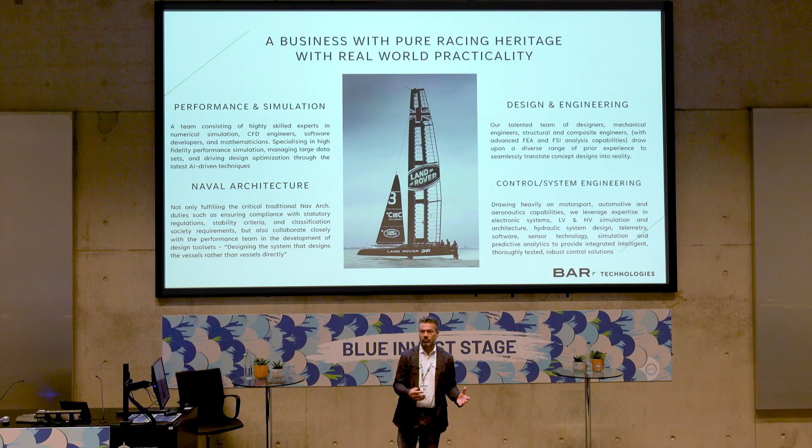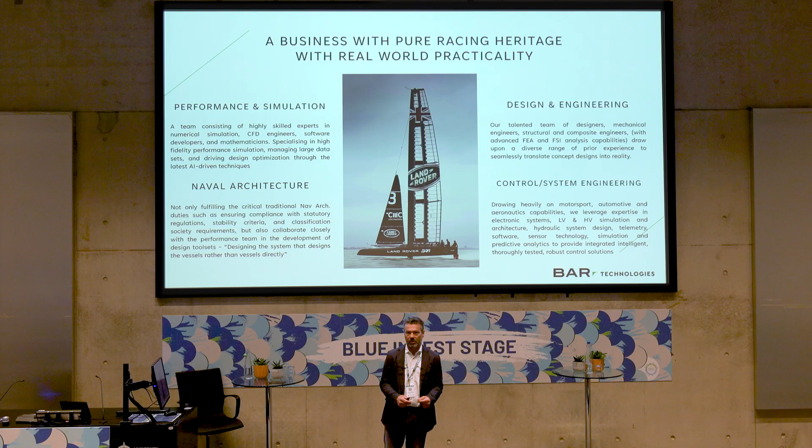BAR Technologies stands for Ben Ainslie Racing Technologies. Ben is probably the most famous sailor in the UK, with many gold medals and world championships, and now involved in the America's Cup. This business was born from the 2017 America's Cup cycle. At the end of each cycle the rules change, leaving a vacant period where engineers are often lost to Grand Prix racing or America's Cup racing, along with their tool sets and skill sets. Ben, along with Simon Schofield and Martin Whitmarsh, started this business to bridge that gap - to not waste the technology developed in the world's best yacht race, and instead bring commercialisation.

So we are a small inventor. We rely very heavily on simulation and use those tool sets all the way through our business. Whatever we design, we do not design by a human - we actually train neural networks to interrogate potential designs and then choose the design that best fits.

So we cover performance simulation, design and engineering, naval architecture. One really important aspect in the marine industry is that everything moves slowly - not just the atmosphere and pace of life, but the control engineering itself. Rudders move slowly, engines move slowly, and some of the projects you'll see require faster, more detailed, more accurate movement. So we've hired a big team of control systems engineers from automotive, Formula One, and aeronautics, and brought them to BARTech. Now we have really rounded skill sets in terms of more traditional naval architecture and people driving the business forward.

The second slide is on this graph, and you'll see - so it is a company dedicated to decarbonisation, but one of these projects we've done is certainly not green. We did need to do it when we were starting the business because we had to pay the bills. So there's the America's Cup boat on the top left.

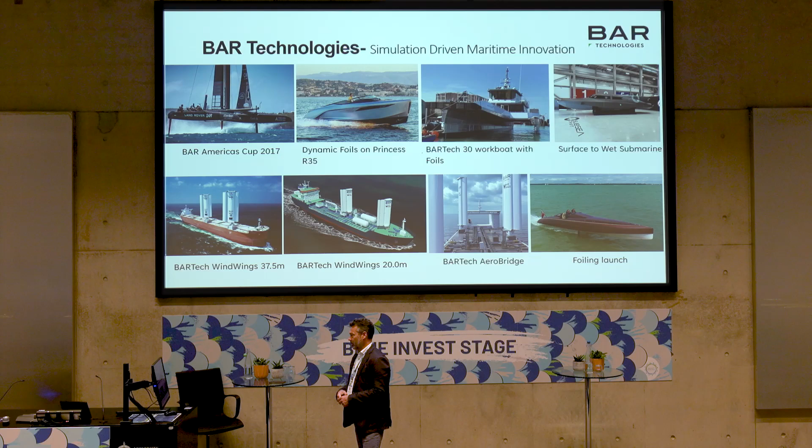Now on to the real decarbonisation and probably our future. We have two products, and I'm going to go through all of these on the bottom shelf here. So BARTech WindWings, that red boat there, I'll show you a video in a minute, but it's over 200 metres long. It's a bulk carrier taking grain around the world, and we're putting some very high-tech sails on top of it, about 37.5 metres off the deck. You can see the extent of what modern sailing means.

In the middle, we have some slightly smaller wind wings, a similar thought process, but in a smaller version. The second project I'm going to talk about is the BARTech AeroBridge.

Have a look at the accommodation block at the back of the vessel. It's basically a block of flats that just pushes through the water, creates a horrible draft and drag, and our efforts here are actually a low drag accommodation block. As you can see, it's two accommodation blocks with a big hole in the middle. We've got some very clever people, but when you look at it, you think, well, that's not brilliantly clever. But actually that accommodation block does provide thrust to the vessel.

And lastly, a foiling launch. It's actually a 6-seater, and there's my CTO and my Chief Operations Officer enjoying a jaunty trip around the Isle of Wight. I was going to ask you which one you thought was not green, and of course, it's that one.

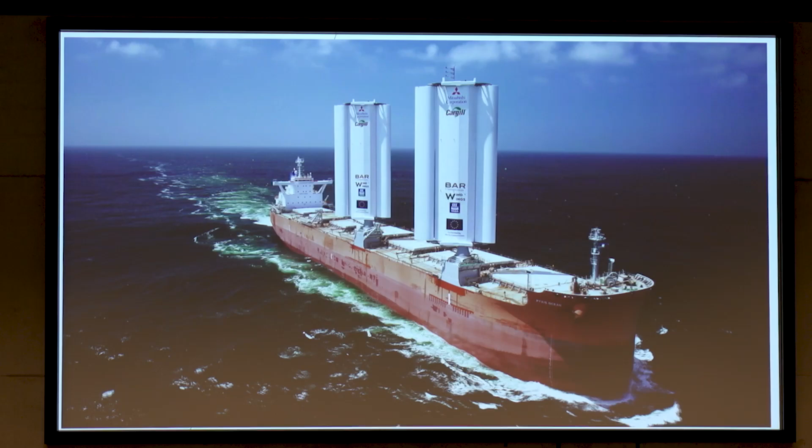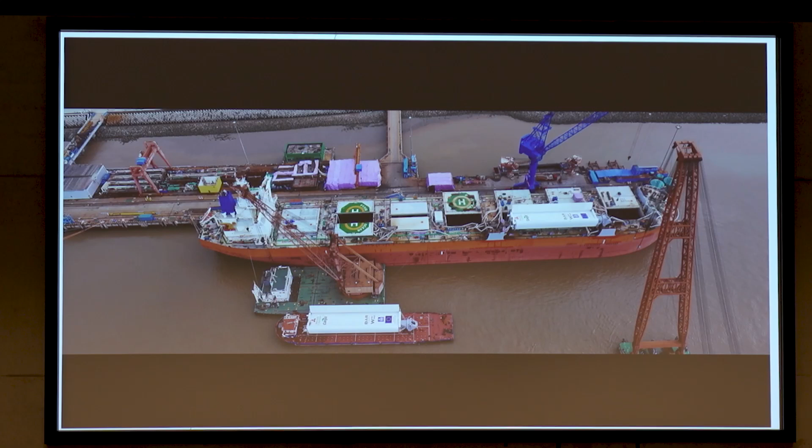This project is truly revolutionary. It's never been done, specifically not at this size and scale. Perhaps it's more than commercial. We believe in decarbonisation of this planet. Innovation doesn't exist without taking risk, but we think this technology is really a game changer.

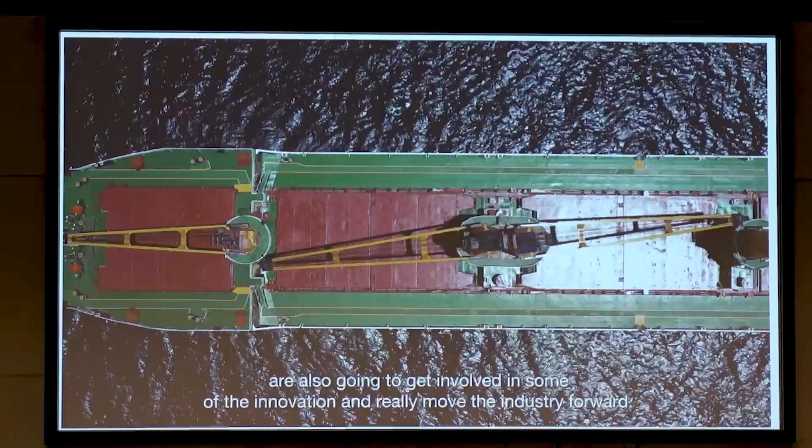The industry is an extremely hard industry to decarbonize, so there aren't many tools that you have. It's really important that we, as users of the maritime industry, also get involved in some of the innovation and really move the industry forward.

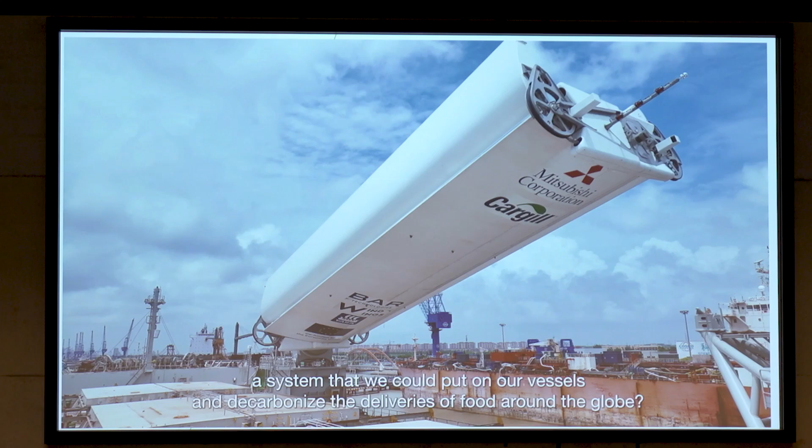Cargill walked among us and said, could you actually invent a wind propulsion system for us? A system we could put on our vessels to decarbonise the deliveries of food around the globe. They probably know more about shipping than BARTech. We're the techie guys knowing how to invent things, and that partnership's been really strong. We fed off each other - that's about energy, expertise, technical know-how, and drive and determination. It's what we've done together. It's not easy, otherwise everybody would be inventing wind for ships.

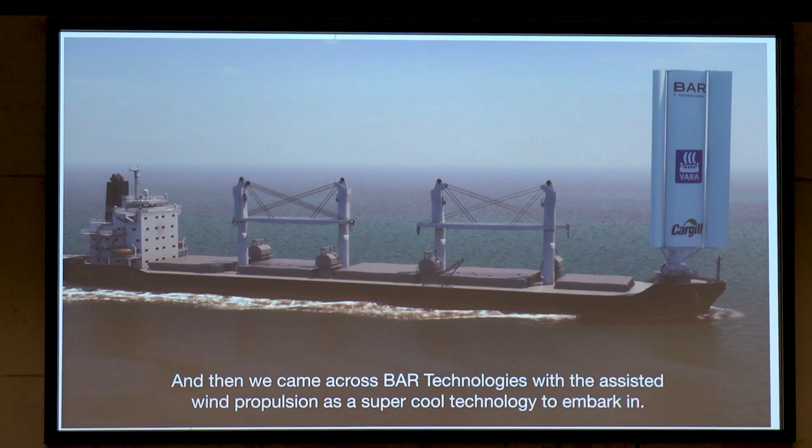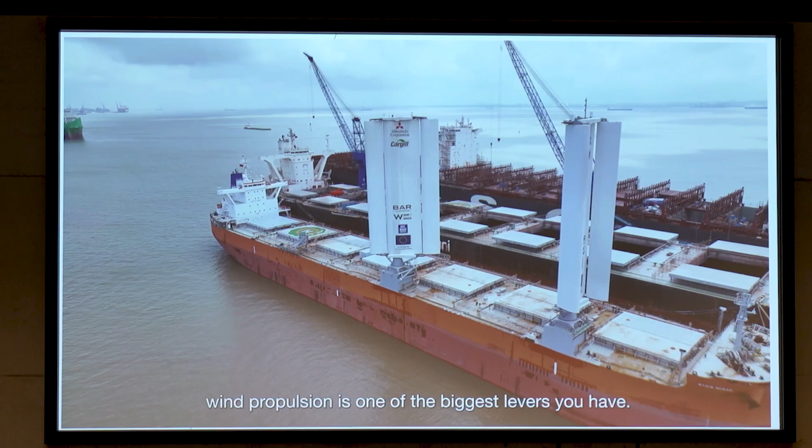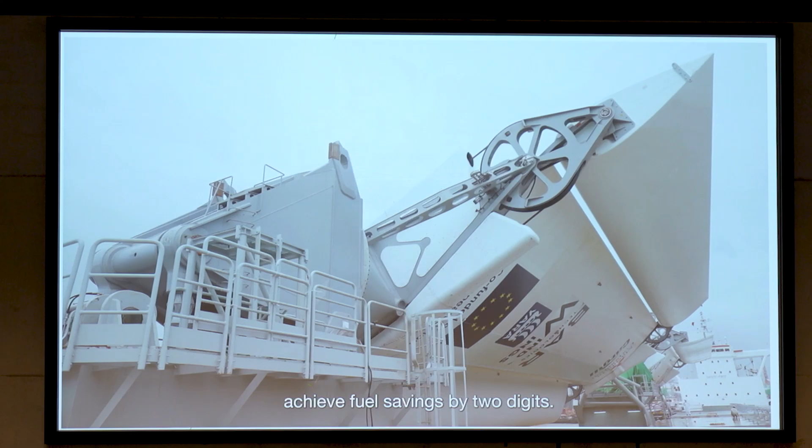We were looking for interesting technologies we could bring in-house to make the maritime industry greener. Then we came across wind-assisted propulsion technology as a super cool technology to embark on. If you look at the rate of savings, wind propulsion is one of the biggest levers you have. There are so many energy-saving devices in the market today, but wind-assisted propulsion is one of the very few solutions that can achieve fuel savings by two digits, and it can be retrofitted.

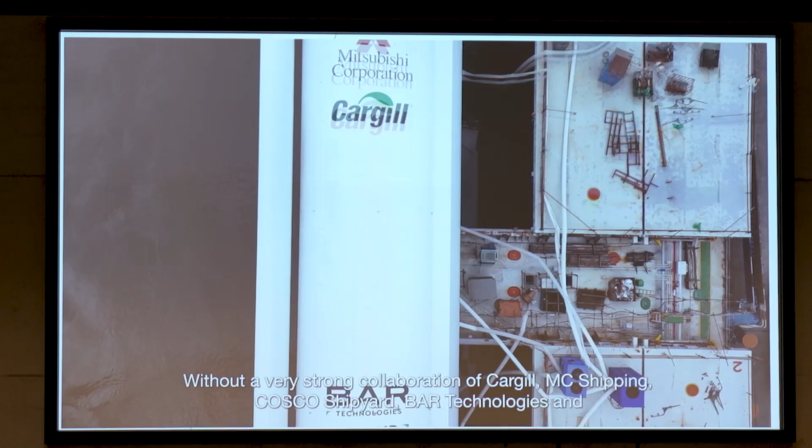One of the strong learning points in the shipping industry is it's all about partnership. Without a very strong collaboration between Cargill, MC Shipping, COSCO Shipyard, BAR Technologies, and the underlying technologies, we would not have been able to bring these to the water that fast.

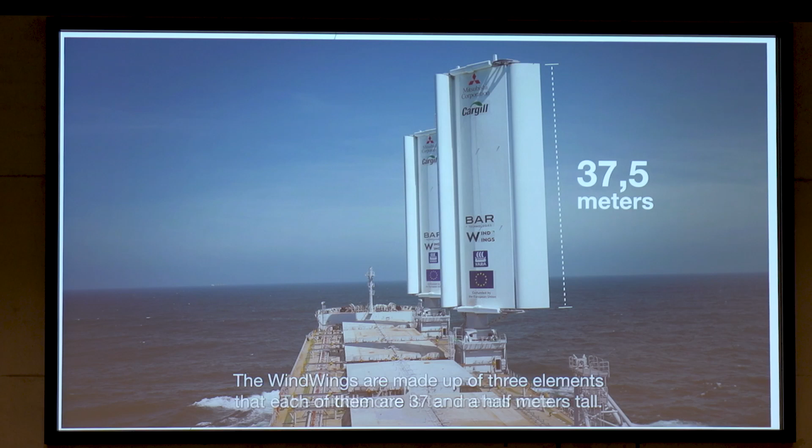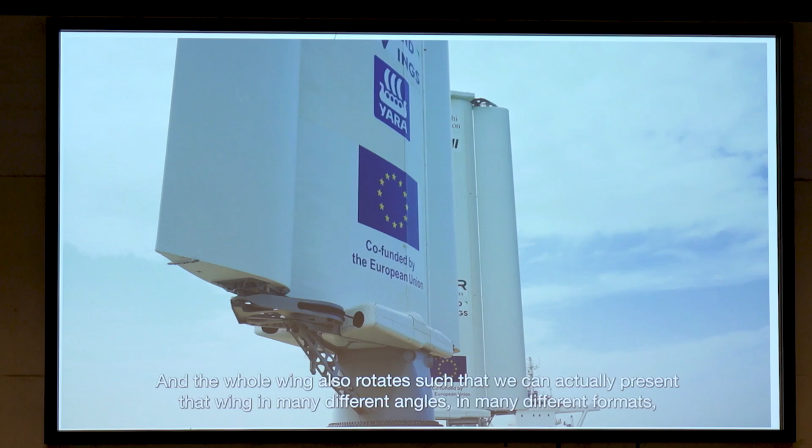The wind wing is made out of 3 elements, each 37.5 metres tall. The middle one is 10 metres wide, and the front element is 5 metres wide, a duplicate of the rear element, also 5 metres wide. They work together - each element has a central pivot, and the whole wing also rotates, so we can present that wing in many different angles and formats, depending on the wind angle and wind speed.

This innovation is extremely important for the maritime industry because it's a technology using wind, which is free fuel at the end of the day. Each of these wind wings is saving 1.5 tons of fuel a day - that's 4.65 lower CO2 emissions per wing per day. That's next level savings. We hope to gain a lot of insight from this solution, which would open the doors to expanding the application to other ships in our existing fleet.

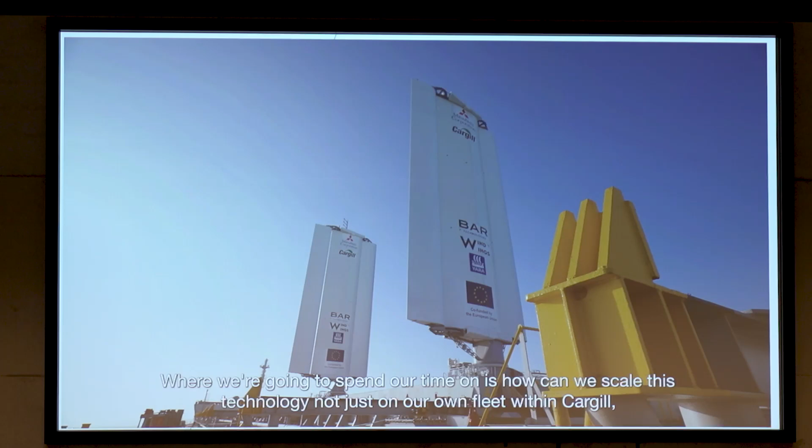The real fight is the legacy fleet and new builds in the future, to bring grain, in the case of Cargill, or other goods around the world using far less fuel. Where we're going to spend our time is figuring out how to scale this technology, not just on our own fleet moving cargo, but also very much in the rest of the industry.

So that's very much a reality now. It's been sailing, and I mean sailing, for a year. We've picked some really good partners to start with. Cargill's the biggest private company in America, and of course Mitsubishi don't need any introduction, they own the vessel.

For our second vessel, we chose, or it chose us, of course, the owner chose us. This is the Berge Olympus by Berge Bulk. It is the world's most powerful sailing cargo vessel. As you can see, it has 4 wind wings on it. It's actually chartered to Vale in Brazil, and it runs from Brazil to China and back.

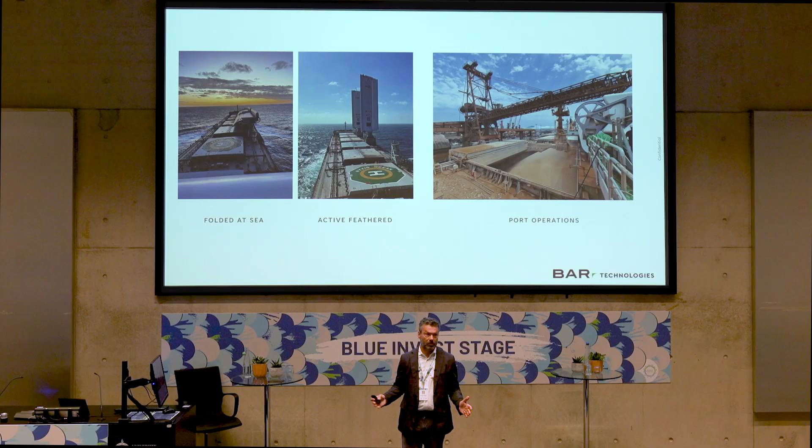It's really important that you get the operational capability right of any wind propulsion device. You've got to be able to get it out of the way of tugboats, you've got to be able to control the power, and you've got to be able to ensure that loading and unloading is done unencumbered.

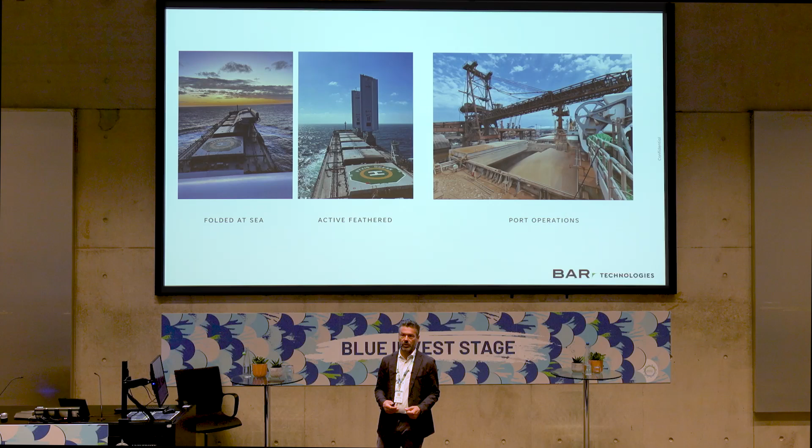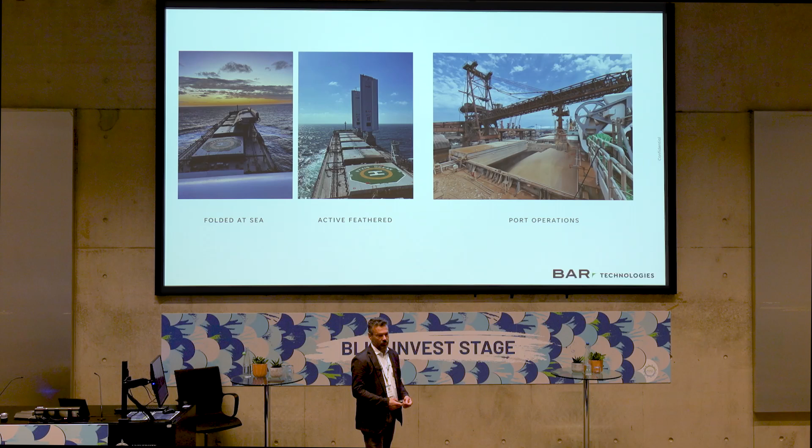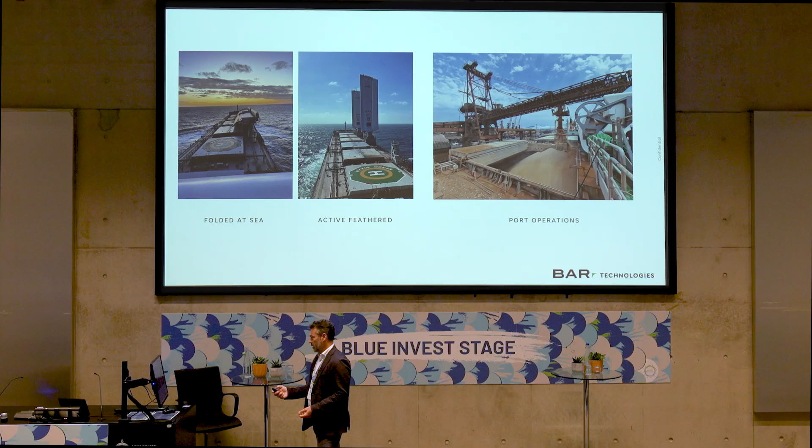So there are a number of different positions that we have the wings in. Folded at sea, that's also how the boat comes into port, because it's inside the beam of the vessel. Active feathered, we encourage people to fold the wings at 50 knots, which is of course quite a big wind, but we're able to depower the wings and have the wings up to 100 knots, which is a very fierce storm. And then portside operations, there's one further fold to get them outside the hatch covers.

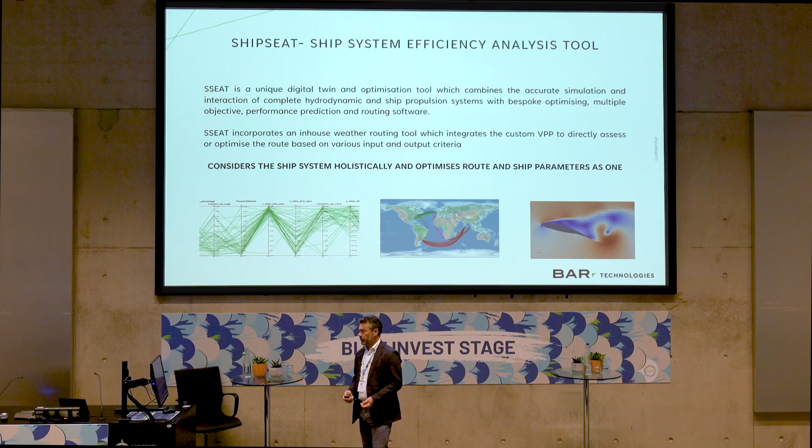I'm not going to go through this in detail. In fact, I'm not going to go through this at all in the interest of time. But it's basically our design tool set that I was talking about in our introduction. I will go through this.

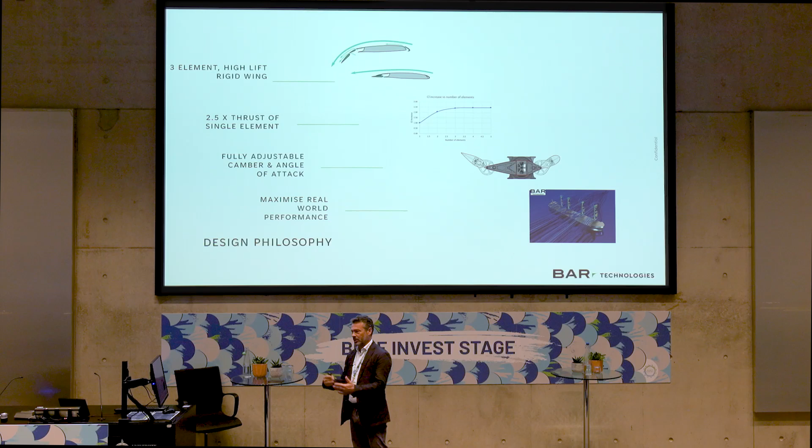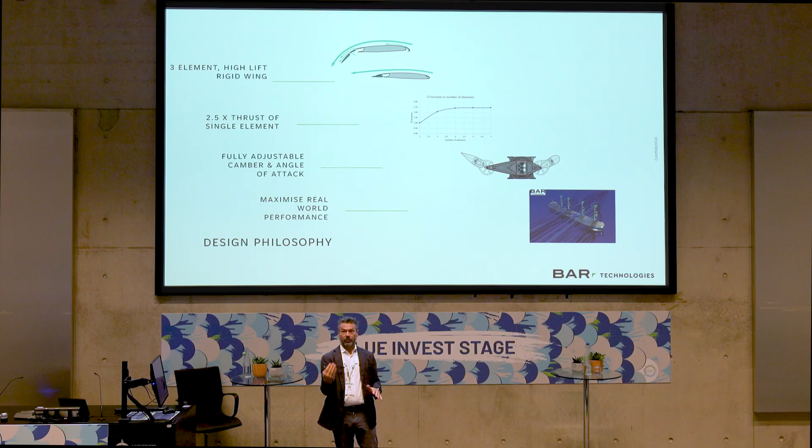Actually, what's the best analogy for a wind wing? It's actually an inverted aircraft wing. So I travel in the cheap seats around the world, so when I'm coming into land, you can actually see the nose coming out the front of the wing and the tail coming out of the back of the wing, and it's a nice sort of cambered shape. And what the aircraft's doing is actually slowing down and providing upward thrust as it's slowing down and landing nice and gently. So you take that thought process and invert the wing and put it on a ship.

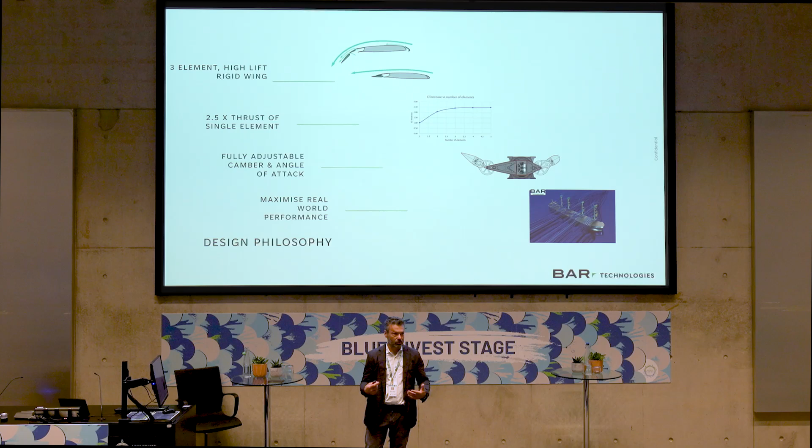What you're then doing is creating a mechanism to give you forward thrust. Add some very clever control systems engineering, and you've got a workable solution for sailing around the world.

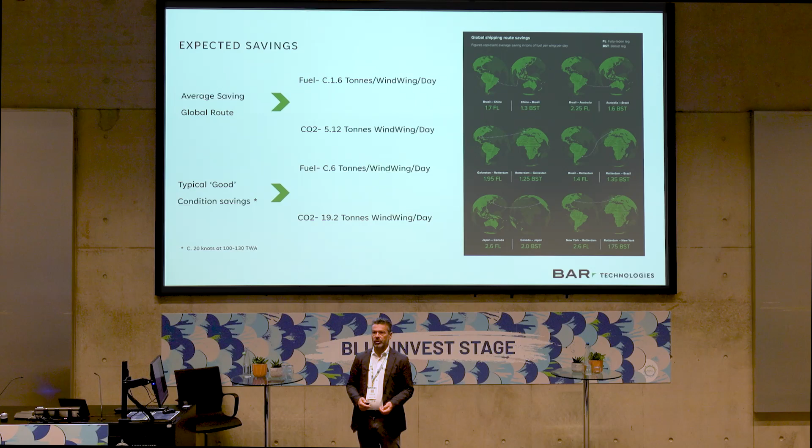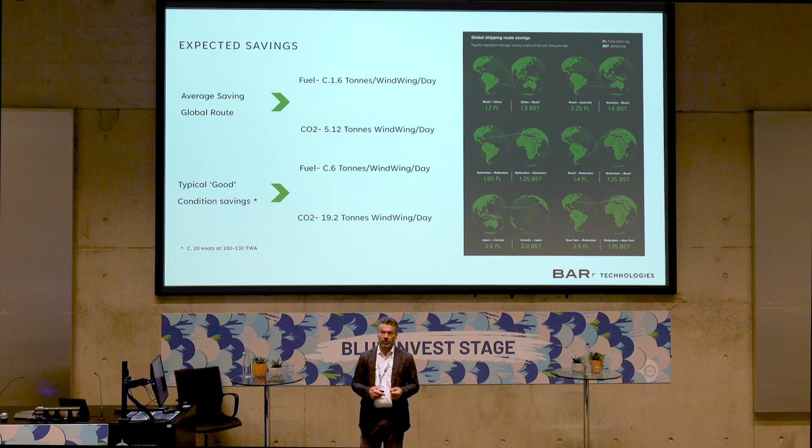I think the video did a better job of this, but actually our technology is worth 1.5 to 1.6 tons of fuel per wing per day. So that Berge Olympus was saving over 19 tons of CO2 a day. And each individual in here, if you're European, your footprint is about 10 tons of CO2 a year. So if you think about it, the saving of that vessel is the equivalent of 2 of you in the audience for each year. So significant.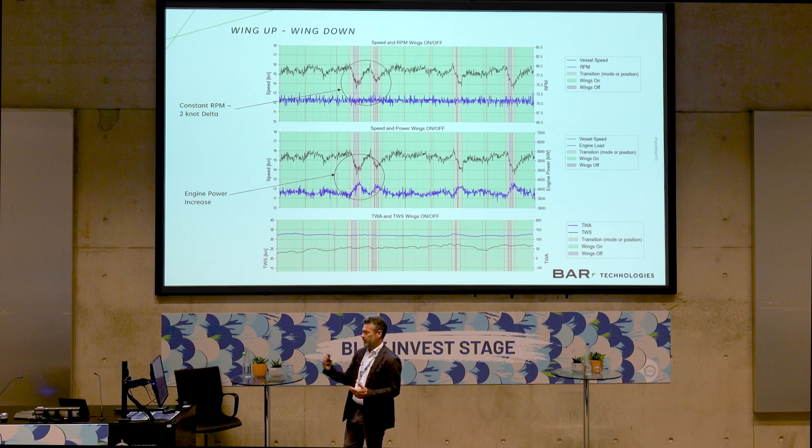It's real, it works. Here is some data. I'm not going to go through a huge amount of it, but basically the green is when the wind wings are up and working. The sandy colour is the transition to the wind wings, we call it feathered, but turned off or folded, and the red is when they're in fact folded or wings off. And lots of different people use these wings in different ways.

You can turn the engine RPM down to minimum RPM and save a lot of fuel. You can leave the engine alone and actually make the vessel go quicker, one of the biggest green things for big ships is to go down to slow steaming RPM, but actually owners can have a bit of both with wind wings and tune ship speed, which is also on board, to decide when you want to arrive at your port, how much engine you use and how much wind propulsion you use.

There's so many debates in maritime that talk about hydrogen, ammonia, methanol, and actually wind is free. It genuinely is free. It's used at source and never diminishes. I can't think of a better fuel.

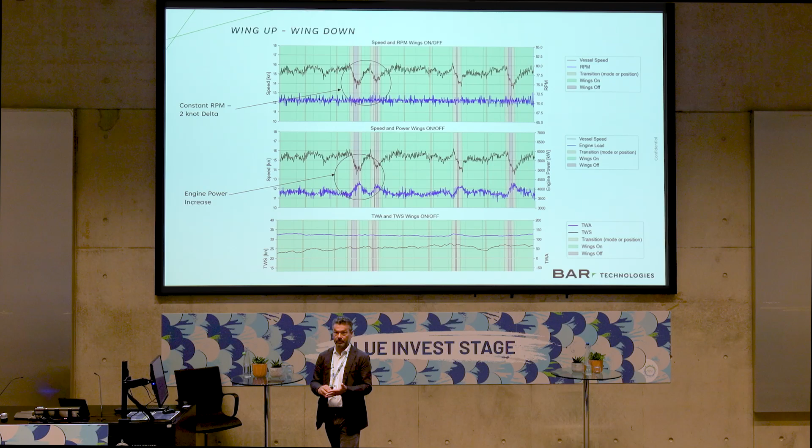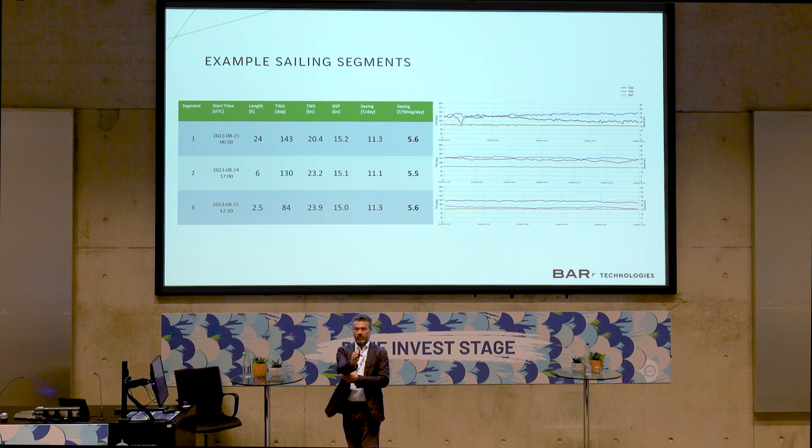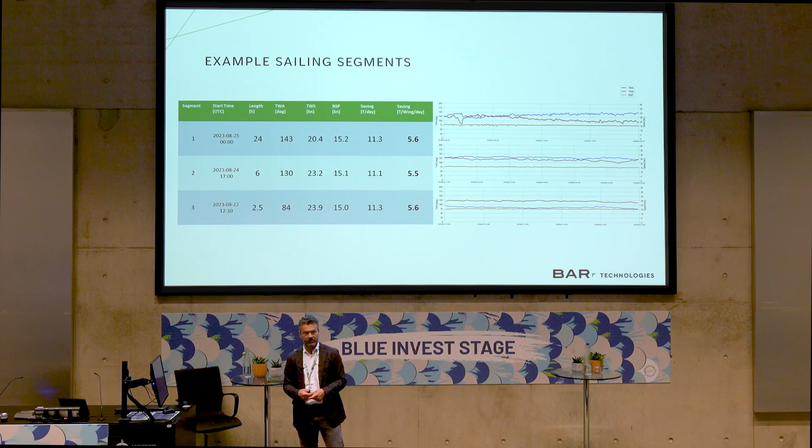So we talk about this 1.5 to 1.6, but actually in open ocean, there's some very big savings to be had. So 24-hour period at the top, so a whole day. True wind angle, sorry about the technical bits, of 143 degrees off the bow, so just behind. True wind speed 20 knots, so not a very big wind, and we're saving 5.6 tons per wing per day. So open ocean, much more saving, and closer to the ports, of course, less wind and less saving.

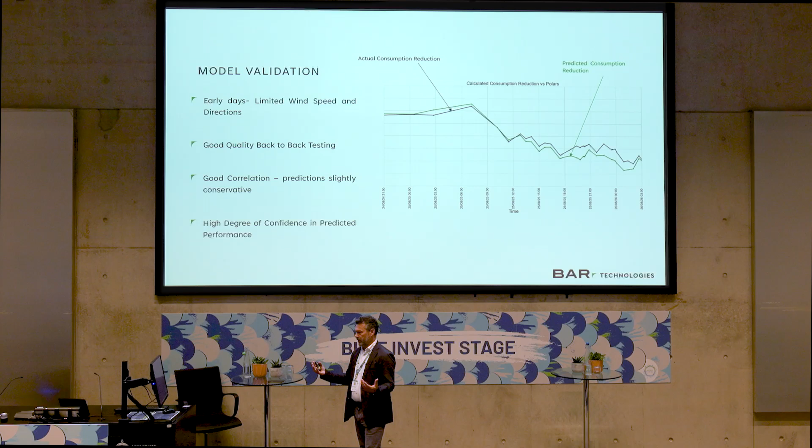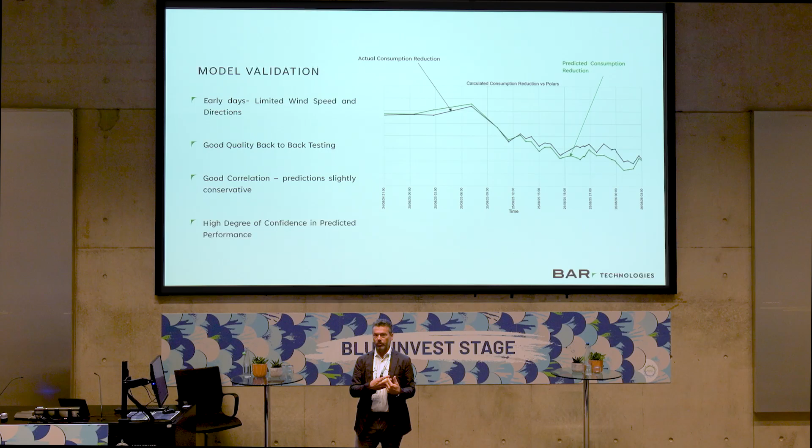I'm going to skip through this, but basically the simulation model that we used to design wind wings, we then use to simulate the savings for the owners. One of the key things we had to establish right at the start was: is it accurate? Could we be really confident giving guarantees to our future owners? And that's what we're now doing, because the correlation is so good to what we thought it would be.

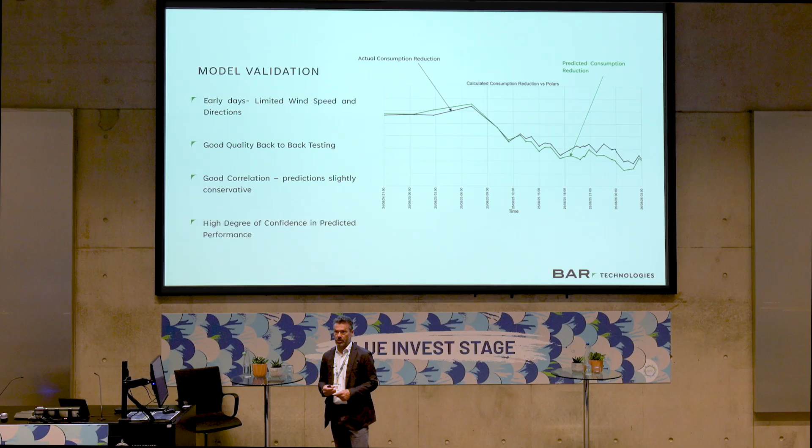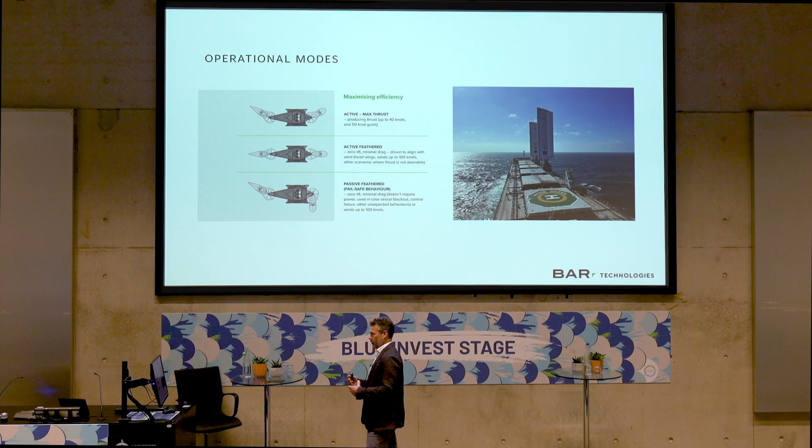Active feathered: if you point all of the wings into the wind, they provide very little drag and no thrust whatsoever. The biggest issue with any wind propulsion system is the worst possible scenario - how do you keep your vessel safe? So if your captain decides not to fold the wings at 50 knots, decides to steer straight into a storm, and then the ship loses power, you've got your perfect storm of mistakes.

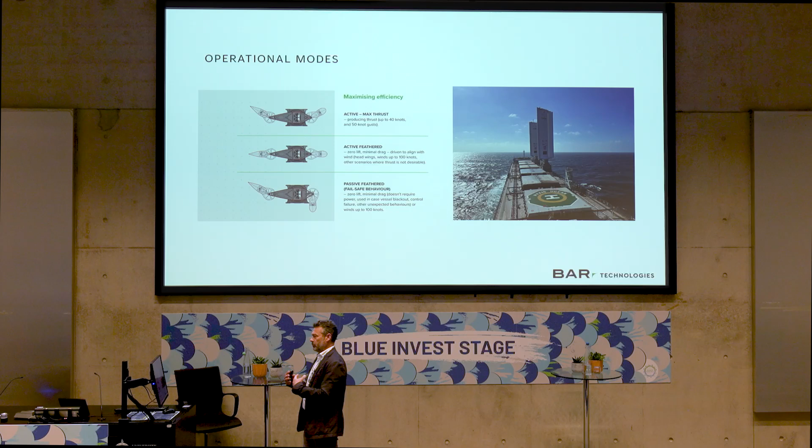What happens to the wings? As soon as the ship loses power, there is a positive accumulated charge, and that charge releases the gearbox and releases the wings into what we call passive feathered, which is a little bit like a weather vane, producing no thrust.

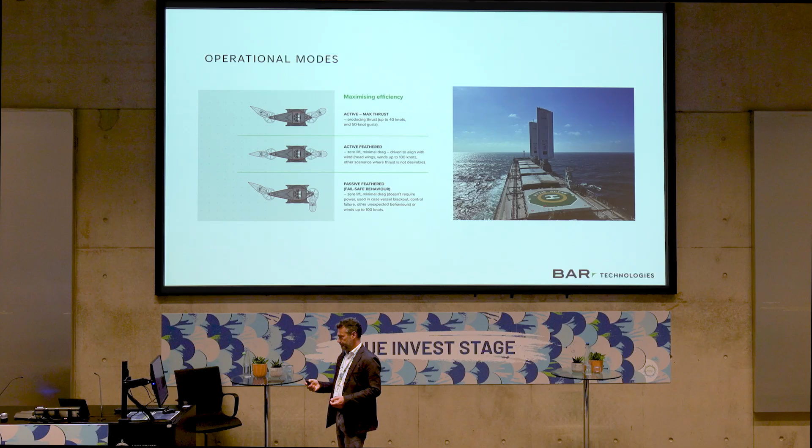I'm going to skip through. We have a suite of tools on board, so no sailors required.

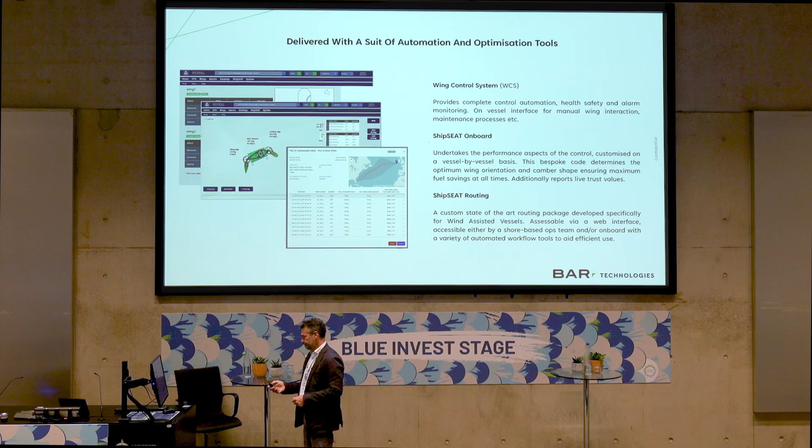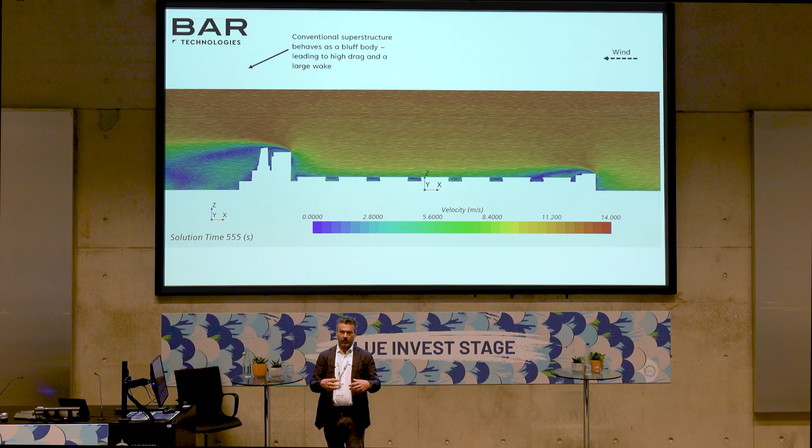So, second dive into decarbonisation. When we were looking at vessels, deciding how big the wings would be and where we would put them, we did a lot of CFD, a lot of analysis of the pressures you'd see around the vessel.

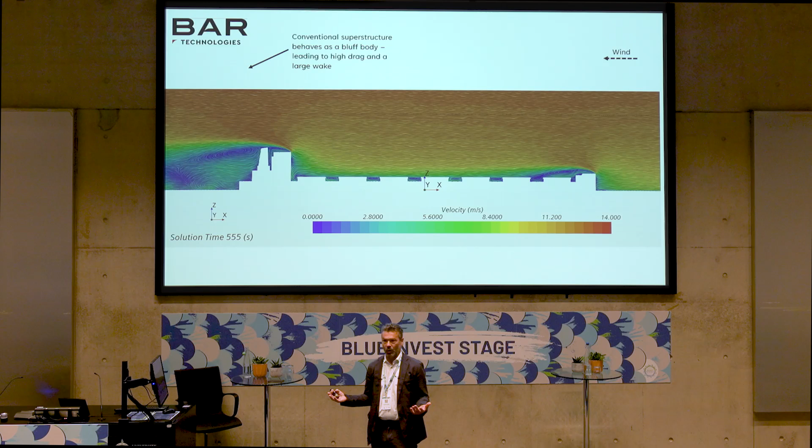At the back, that's the accommodation block. The first square is where the crew sleep, and the second square is the funnel for the engines. You can see that blue area behind, which is basically drag. It's like - which is more aerodynamic, a Ferrari or a transit van? It's... no, the other one. The Ferrari is more aerodynamic, the transit van is more draggy, and this is a transit van basically on the back of a ship.

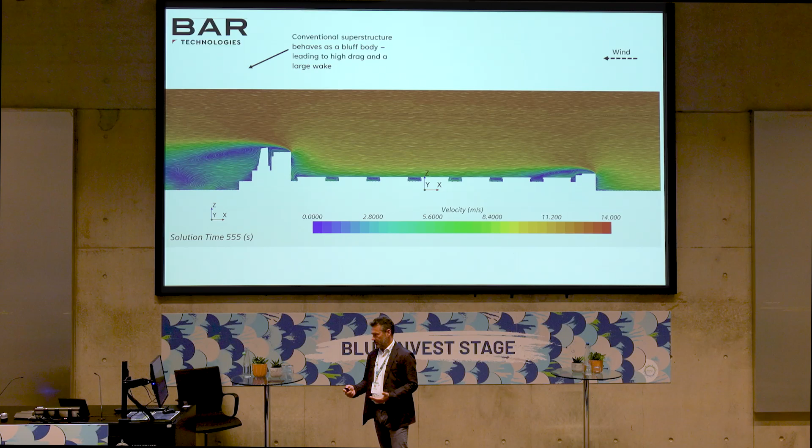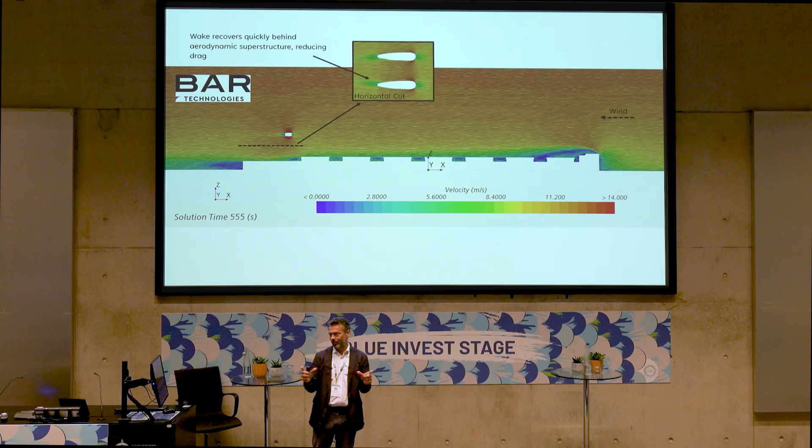So we thought, surely we can do better than that. So we designed that aero bridge that I'll show you again in a minute. Instead of having one accommodation block, let's have two accommodation blocks. Let's share the ground floor so the crew all work nicely together - that's where the messes are, the gym, and all that sort of stuff, so everybody still works together. And when they go to sleep, they don't just go up one set of stairs, they go up two sets of stairs into two accommodation blocks that are like foils, and then the bridge goes across the top of that.

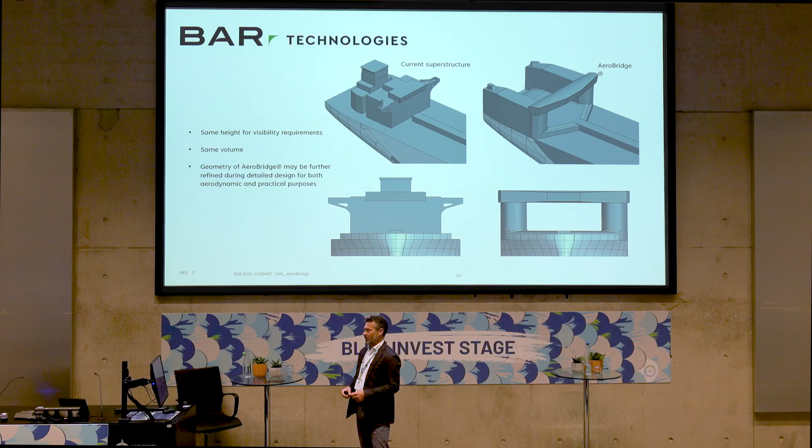So there's a traditional one on the left, and there's our fairly funky BAR Tech AeroBridge on the right, which we're now taking out to shipyards throughout the world and to owners. We've actually sold the first one of these, and the owner loves the fuel savings, but he certainly likes how cool the ship is going to look. I think aesthetically traditional ships aren't that great, and hopefully we can make owners and charterers more proud of how the ship should look.

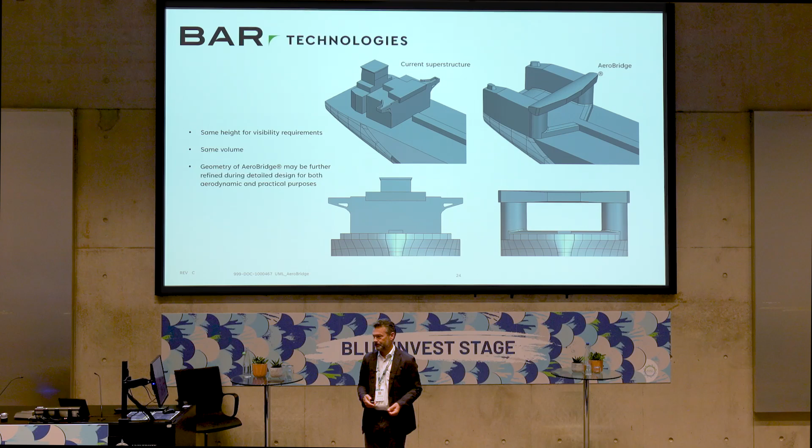So performance - you've got conventional and our aero bridge comparisons. Where the wind is at 60 degrees from the bow, the conventional block has a negative impact on the vessel of 11.4 kilonewtons, and the aero bridge has a positive impact on the vessel of 1.4 kilonewtons. So there's a difference of 12, and actually the aero bridge at that stage is providing literally thrust to the vessel.

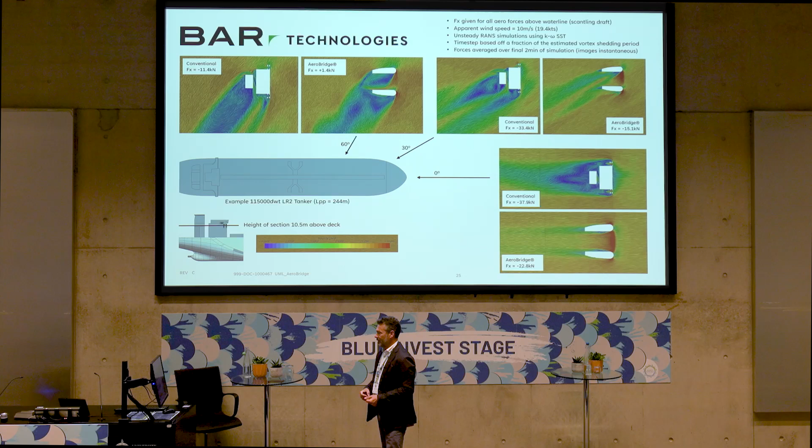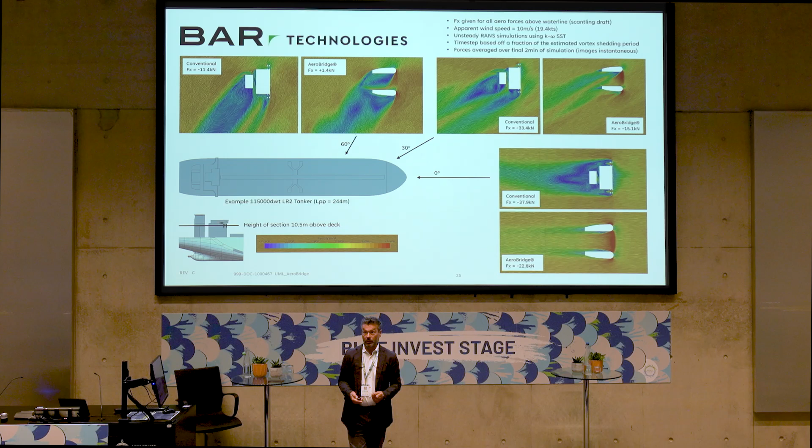At 30 degrees, conventionally the old style accommodation block is giving 33 kilonewtons of drag, and the aero bridge is only 15 kilonewtons - again a very, very big difference. I won't go through the last one, but you get the idea that this is a very low drag solution, and on occasion one that provides actual thrust. And it looks cool.

Third dive into decarbonisation.

So we all know about electric cars. We all know in the maritime industry about hydrogen, ammonia, methanol and diesel - what's going to be the next fuel. Everyone says, well, why can't electric be the next fuel? And it can have its part to play. There can be some battery storage, some incremental power, but it's not as dense as dinosaurs, and it's not as dense as those other fuels, so we need to be careful with its use.

The reason cars are suited to electric is there's not much rolling resistance to a car. If you jumped into a 15-year-old car and took your foot off the accelerator, the engine would brake the car and it would stop very quickly. Not so anymore - you take your foot off the accelerator and your car coasts a long way. All of the rolling resistance has changed on a car to enable better fuel efficiency, but also to enable it to become electric.

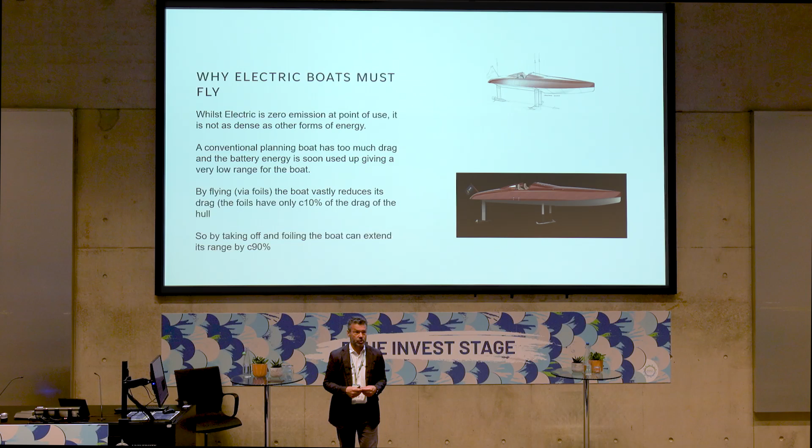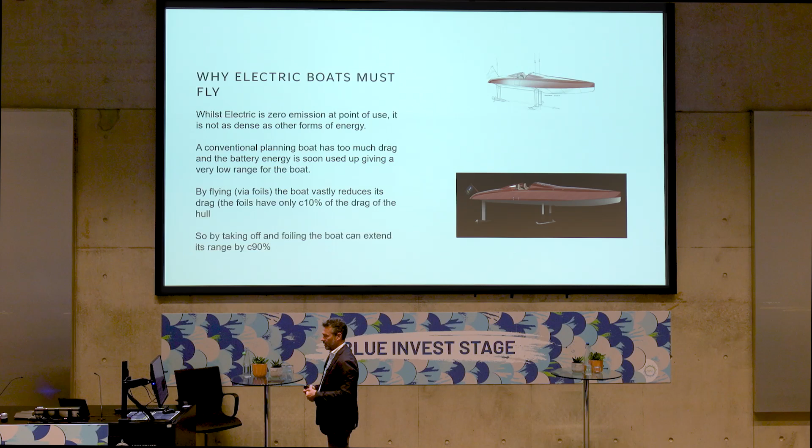And a boat is no different. If the boat was in the water, that would be too much resistance to use a fuel like electric. By flying the boat - picking it up and taking it out of the water, instead of pushing a hole through the water you're pushing some foils through the water - the drag is reduced by 90%, and the requirement for fuel is also reduced by 90%.

So we do things quickly. This was from concept to reality in only 14 months.

The potential owner came to us and said, I have a really good looking rum runner - an ancient boat that used to take rum from Cuba to Miami Beach and drop off in Prohibition days. He said, I love the look of that boat, but obviously we can't run around in that boat. We want an equivalent for modern day. Would you please take a beautiful wooden boat and make it fly? And we said, yes, we will. So we did that in 14 months.

We repurposed some LG cells, which are used in Volkswagens, and we built our own battery cell. We consulted on the powertrain, so we've got a very small motor - a rocket motor, in fact, about this size. But these are all good for prototyping, so when we actually develop it and bring it forward more for the mass market, we'll all be ready.

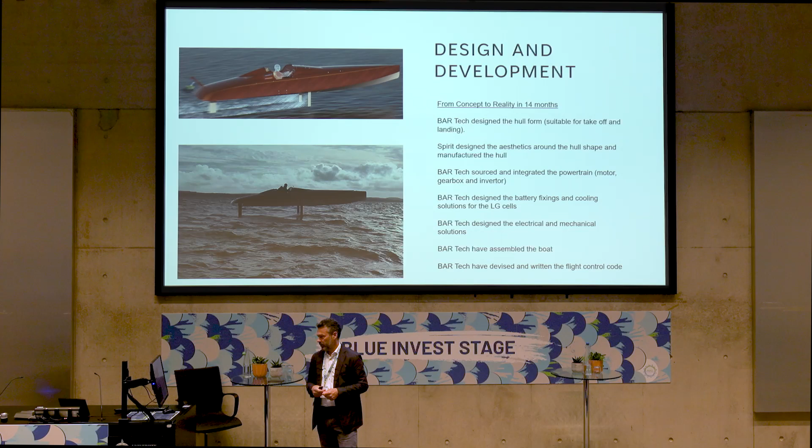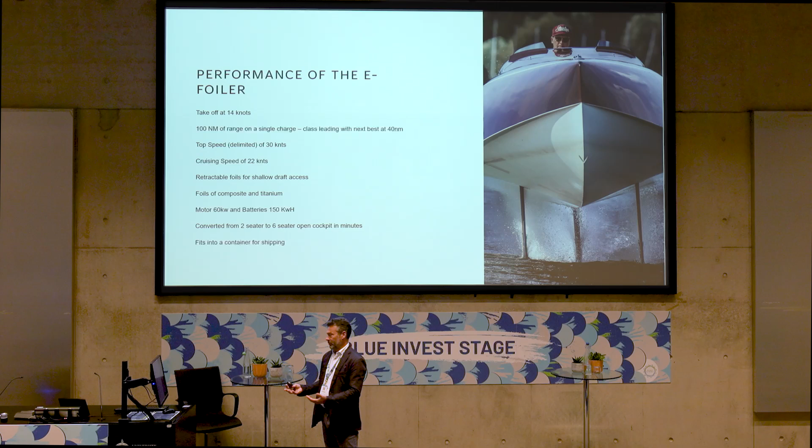Takeoff mode at 14 knots - that's the owner, proudly shown off. The range is actually quite long. A lot of electric boats don't have great range because of this phenomenon of pushing the boat through the water, and water is nearly 800 times more dense than air. So a car is pushing through air largely, and a boat is pushing through a mixture of air on the top side and water on the bottom side, hence the flying, as I'd say.

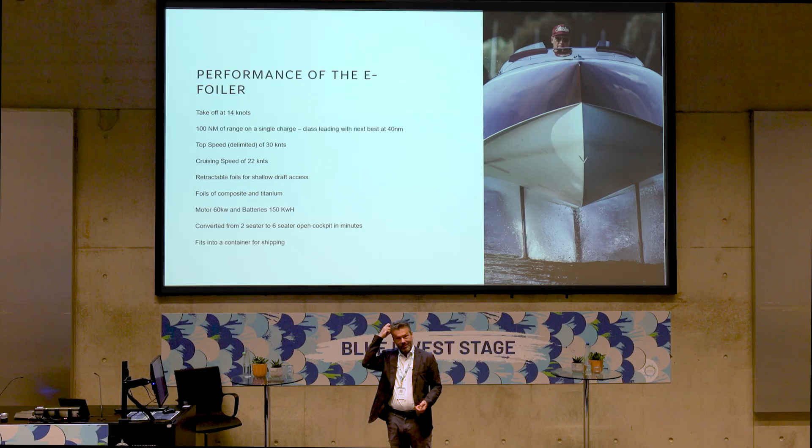It's got a top speed of 30 knots and a cruising speed of 22, and those foils come up through the hull if you want to go onto the beach for a barbecue or into a shallow port. So we've really thought again about how this is going to work, the user profile, and adapted the design. The motor's 60 kilowatts and the battery is 150, about twice the battery requirement of a car. And all of that means you can bring this boat back to the marina and plug it into a normal car charger and overnight charge your boat as if you were charging your car.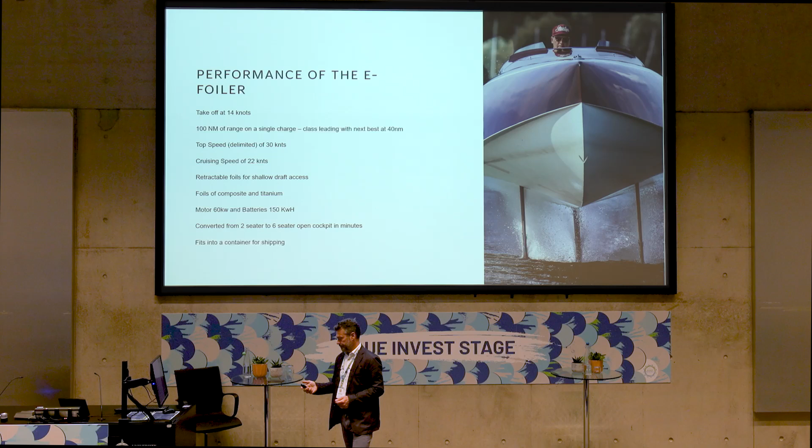So we love design. There's a lot of sailors, a lot of high-performance people. We feel like a sports team.

When we'd made this boat, when we'd launched it - I don't know if everybody knows, but there's a blue ribboned event for lots of different boat types around the Isle of Wight on the south coast of the UK. We were invited to see if we could beat that record, and the record was just over 6 hours for going around the Isle of Wight in an electric boat. We thought, let's add a bit of razzmatazz, so we invited the Royal Yacht Squadron to make sure we had a big cannon off the start and a cannon off the end, and we invited the BBC and several other news outlets. Here's the result.